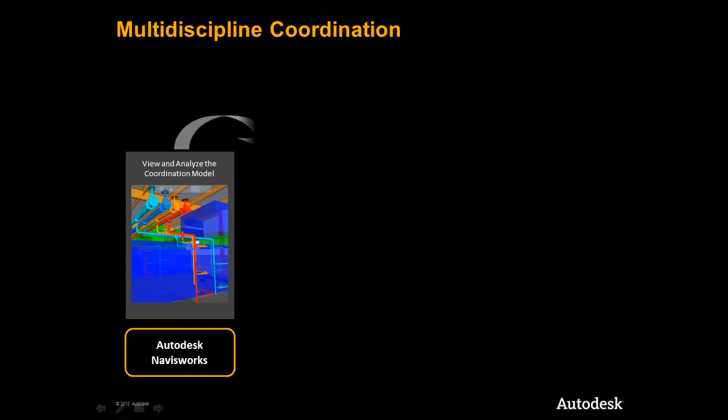We begin our multidiscipline coordination workflow by viewing and navigating the constructability model for our project. We leverage Autodesk Navisworks to do so, which offers construction professionals a comprehensive project review solution, providing enhanced tools for interference analysis and spatial coordination. We can easily and quickly view the multidiscipline models to see if there are any obvious problems, then move into using analytical tools to find specific clashes.

An important aspect of the Autodesk construction solution is not just the ability to find the clashes and conflicts within our project, but to manage and ultimately resolve them. With this next phase of the workflow, we will explore Autodesk Navisworks' ability to quickly clash our models and to manage the information efficiently so we can reduce waste, requests for information, and change orders in the field.

With the conflicts found, we will continue in Navisworks to manage the who and what part of the process to assign the conflicts found to the appropriate stakeholders. We will also take advantage of Autodesk Revit to ultimately make the changes to the design in order to resolve the problems virtually before we get into the field, where conflicts and mistakes have the largest impact on our project schedules and costs. The entire process can be tracked with powerful reporting tools that will ensure we have accurate and timely records of who did what, when they did it, and why.

To that end, we will show how the Autodesk Construction Solution creates detailed reports of the conflict analysis, including the tracking of problems found through to resolution.

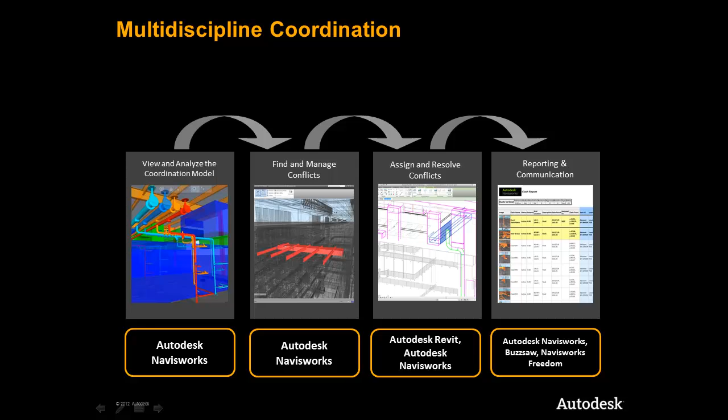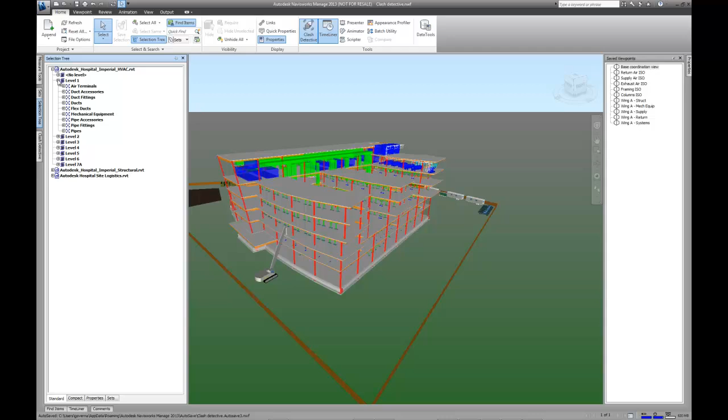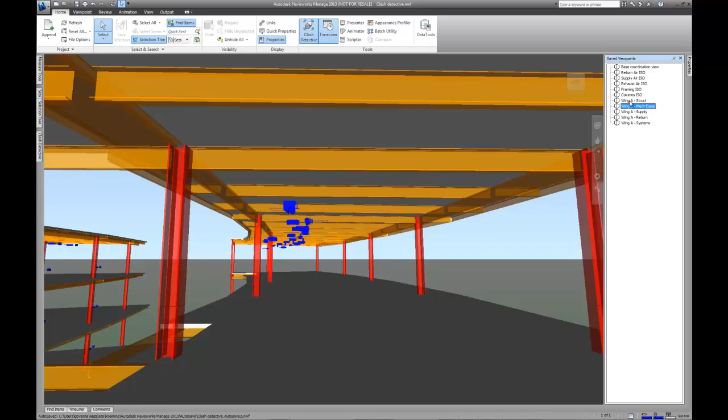Undertaking pre-construction coordination across all trades offers the best opportunity to understand constructability before work begins in the field, and to help avoid preventable RFIs and change orders that can risk project schedules and budget. Constructability models from each trade can be integrated into a single multidiscipline project model, regardless of authoring application. This is a key step to being able to coordinate these disciplines.

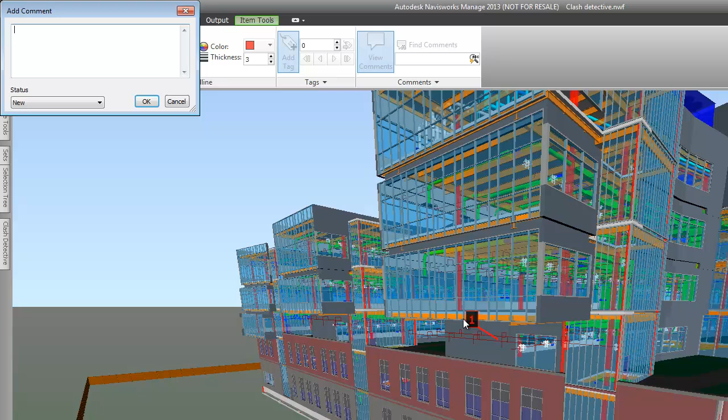By leveraging the constructability model, we can get a whole project view of the coordination issues at hand and begin to take steps to eliminate them by taking advantage of the work already done to create a model with construction intent. Here we can see that just a visual check shows there is a problem with the sprinkler system, and that we see part of the system outside of the building envelope.

We can make a note of the problem that is shared with all project stakeholders and can be assigned to the appropriate party for resolution.

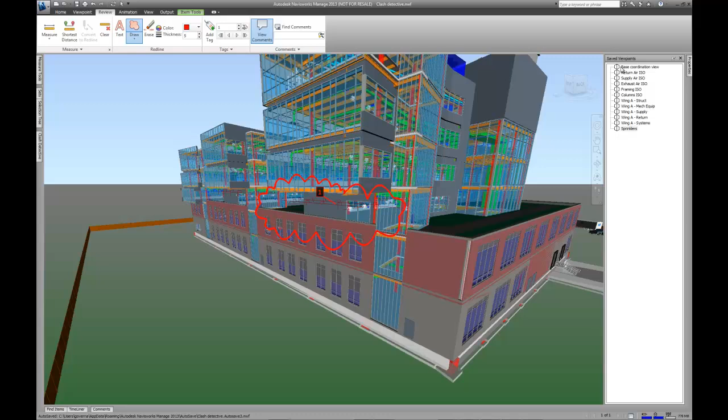The traditional coordination method involving overlaying 2D drawings on a light table is extremely time-consuming and unsurprisingly prone to many conflicts going undetected until encountered in the field. When you bring together design data that has largely been developed in isolation, issues can be expected.

While coordination practices currently exist using 2D paper drawings, using a model-based approach enables a more efficient and robust digital process where you can visually see the issues.

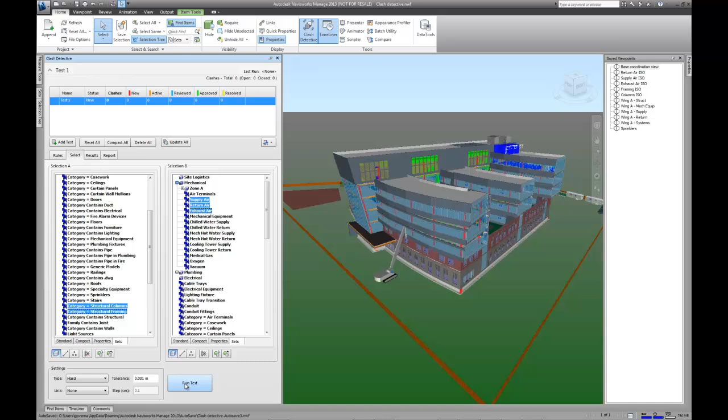The project model can then be analyzed for cross-discipline interferences, be they conflicts with HVAC systems and the steel structure, or adequate clearances around the fire protection sprinklers.

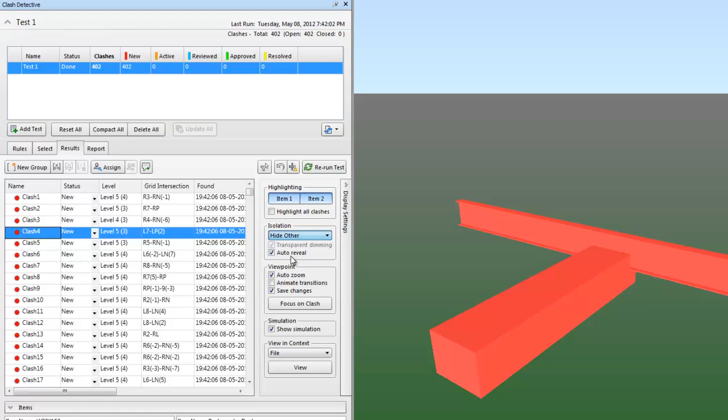Here we can see that a macro-level clashing of the systems and project components can be done. We can also follow our work breakdown instructions and leverage the area and zone schemes established for executing the work. We see how issues can be visualized more clearly, reviewed in a collaborative way, and assigned for follow-up actions.

Once a whole project view is understood, we can then move into a micro-level coordination, where we leverage detailed views of the model and get very specific on which elements are coordinated, and that the coordination is done in a logical and deliberate way, ensuring accuracy.

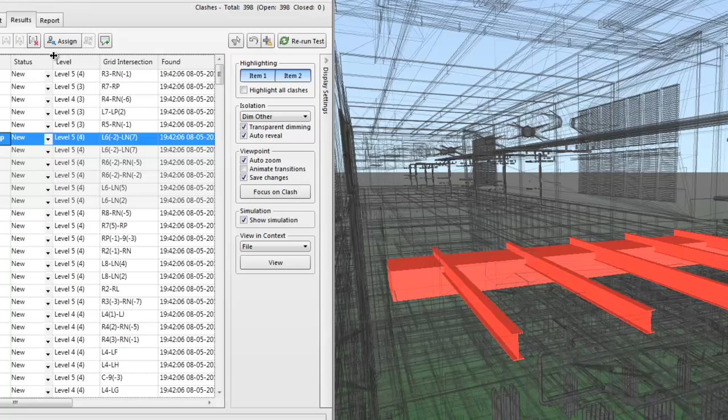The results of micro-level coordination will carry through to the field execution when daily or weekly coordination meetings and tasks are done using the framework and organization of the models done here in the multidiscipline coordination.

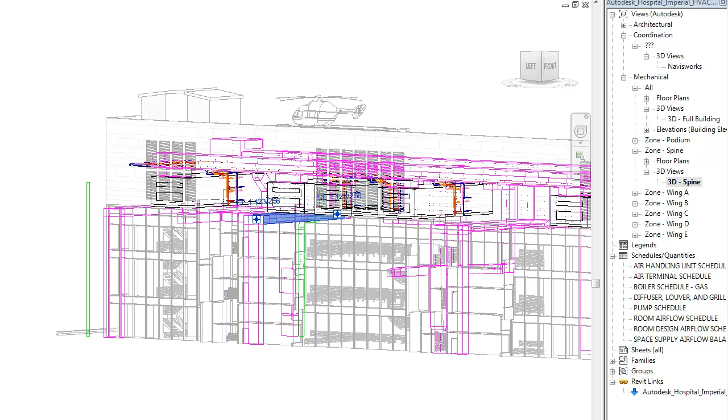As the issues are identified and managed, coordinating the needs and changes with the design or construction models are made easy with tools that group similar conflicts together, review in both 3D and 2D, and can switch between the single construction model and the originating design model.

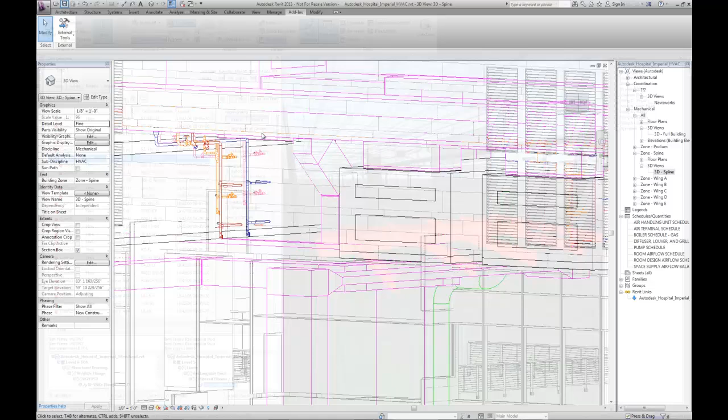Here we see that we easily group clashes for one building component together, assign them to the appropriate stakeholder, and easily switch to the design application where the conflict can be resolved accordingly. This saves time in locating the conflicts and ultimately streamlines the workflow for resolving them.

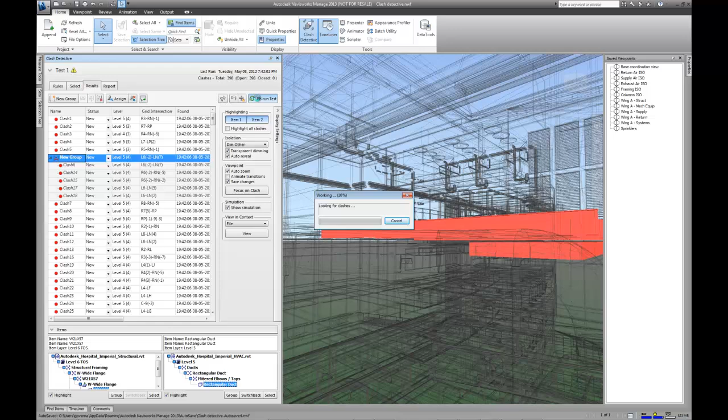We can also collaborate with distributed teams by sharing the relevant information in a controlled and secure environment, leveraging the Autodesk Collaboration and Data Management solution. This enables easy communication of issues and synchronization of subsequent changes across the many team members and locations.

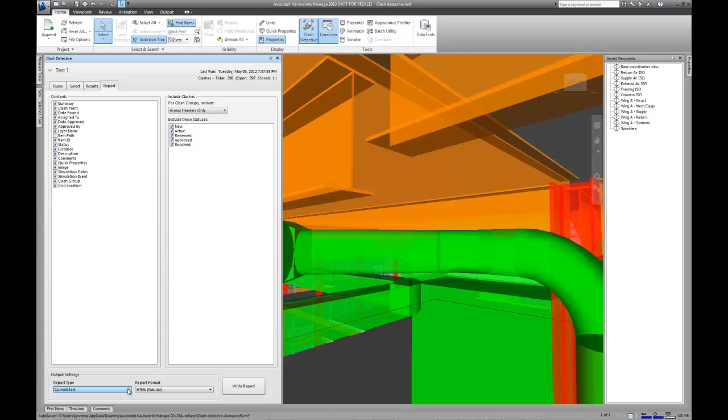Using the Autodesk construction solution and a model-based approach for coordination and analysis for multiple disciplines helps determine whether the various designs fit together and provides the opportunity to resolve any conflicts during the planning phases when there are no materials, equipment, or field labor costs involved.

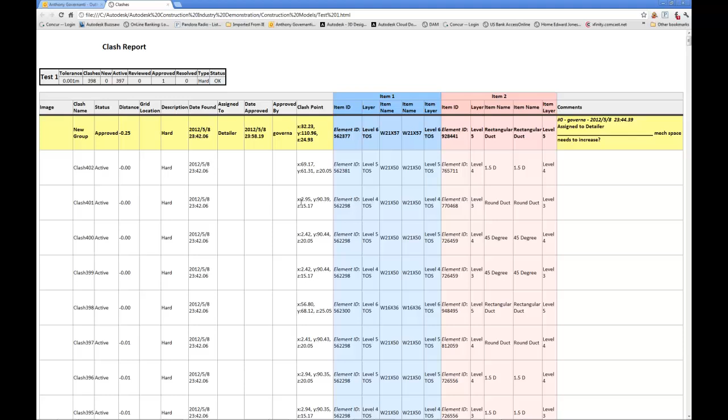The Autodesk construction solution provides a powerful and consistent framework to coordinate all disciplines involved in the BIM construction workflow that leverages an open platform to ensure all the appropriate project information is available throughout the entire coordination workflow.